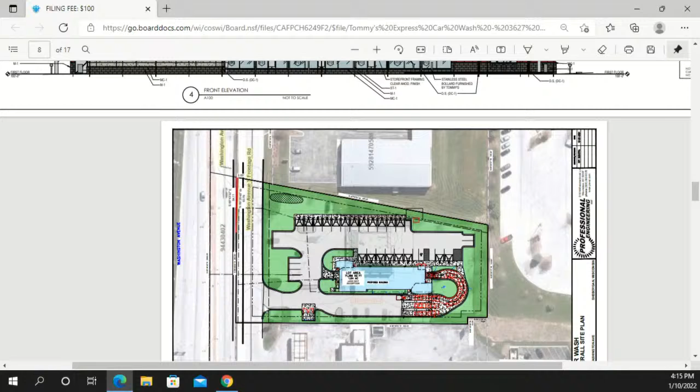This building is a pre-manufactured metal structure made with ACM metal panels for the red, the black, and the white.

There is also, you'll see, these are stainless steel metal pieces that will go along here, along with a composite material here.

If you'd like, I'd be happy to pass around a material board. Here you go. Sure. To give you a feel for how this is laid out, this is the site here.

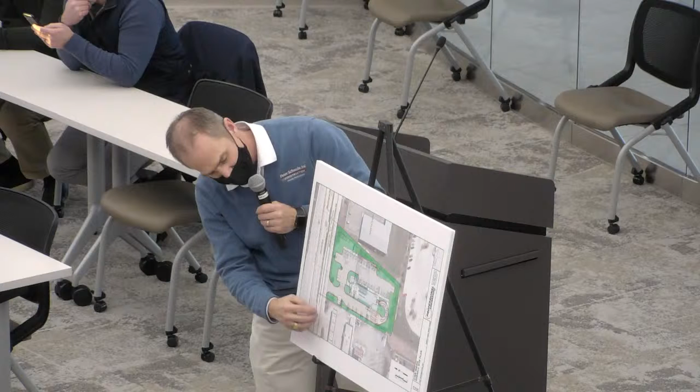This is Washington. This is the access point right along here with the frontage road. There is currently a gas station on a very hard corner, and then another business on this side.

Our property will be accessed right off the frontage road on the north side of the property.

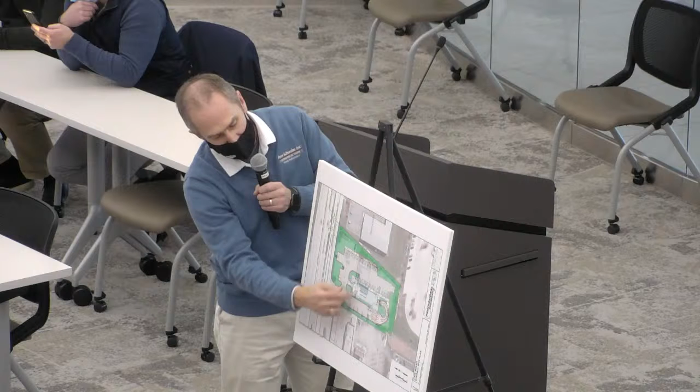Again, the cars will drive through the back side here, the south side, and exit out here, having the choice of going and using the vacuum system over here to the east of the property, or exiting out again on the north side of the property.

From an elevation standpoint, you notice that it's an attractive building with glass to allow a lot of light to flow through the inside of the building while people are going through it. It is also set with 2 towers. One tower is 24 foot tall, the other 28. The 28-foot tower building will have on the first level the control center where someone will be able to stand and see all activity at one time, what's going on. And the second story is the training and management office up there.

And with that, I'd like to turn it over to you to see if you have any questions to help me better explain it.

I think I just need a fancier car to be able to take it there.

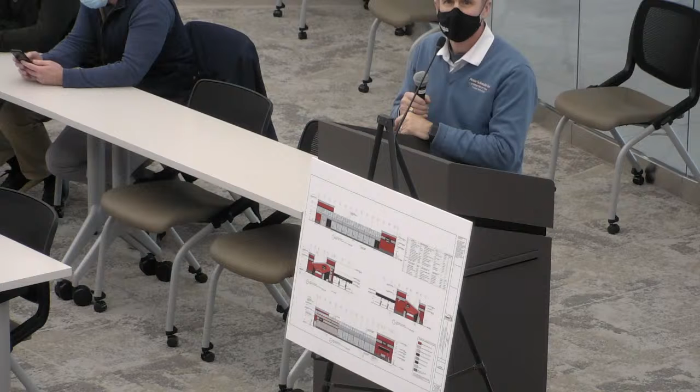No questions or comments from my end yet. Anyone, other board members, questions? Is this the first one of its kind?

Do you have others? This is the first one that's being built in Sheboygan. Steve, can you answer the question as far as other locations of this? Sure. So there's a few others in Wisconsin. There's one in Wausau, I believe, and then there's one in southeastern Wisconsin, Milwaukee area. There's two or three that are actually called Coast car washes. That was the original concept, and now Tommy's Express is starting to franchise these. So across the country or across the Midwest, there's about 60 of these right now, with a pretty aggressive growth plan. And they've been in the car wash business for close to 50 years now as a family, and this is just their next step in evolution here.

And like it was mentioned, it's really a state-of-the-art facility, and even with the light that comes into the car wash, it's an entirely different feel than the typical dark tunnel that you would go through when you go through a car wash, and it's really inviting from that standpoint. So we just think it's a new state-of-the-art car wash we're excited about.

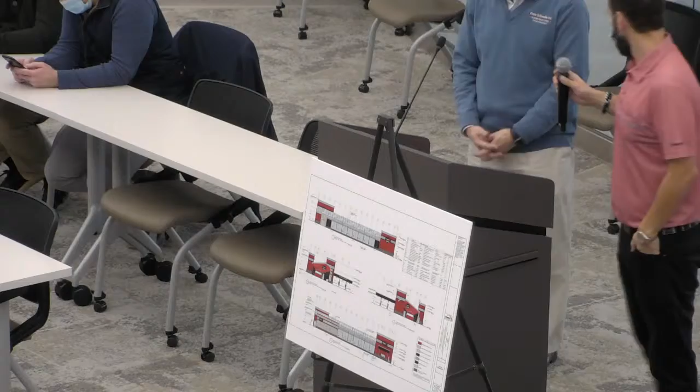Maybe if you could talk just a little about the mechanical systems and if there's any of that visible, or if that still needs to be designed at all, how it integrates with the rest of the massing.

It's a great question. I'll be honest with you, I'm not the expert on the actual system itself, and if you need me to, I can get an expert on the phone with Tommy's. However, I can say this system is already being used throughout Wisconsin in a half dozen locations, as well as around the country. The system, in essence, one of the technological advances of it, has more of a magic carpet system than the old-fashioned rolling track to move cars through. Because of that, they're able to move cars through almost twice as fast as a typical car wash you'd see today, which allows not only for a good washing system, but also helps the citizens of Sheboygan get their car washed a little bit faster.

Yes, Commissioner, he was actually talking more about external mechanicals on top of the building. Oh, okay, thank you. Ground level or rooftop type. I do not have those details with me today, but I can get them for you, or I can get someone on the phone immediately to tell us how that works. Typically, without that information, we'd make that a requirement of the submittal that be submitted to the city for approval, so that we can make sure we don't end up with a monstrous rooftop unit.

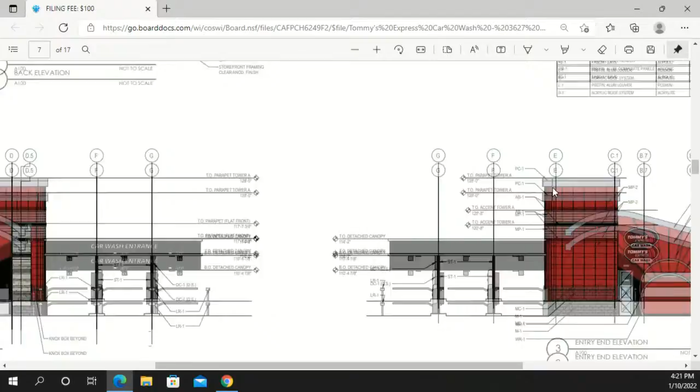And we'll be working with your landscaping department. Right now, we have a transformer planned to be in the same location that you saw in the video, and as you can see, there are some bushes surrounding it to help shield that from the view of the public.

Thank you very much. I could use my projection voice without the mic, but the people at home wouldn't be able to hear me. My question would be why the location for the transformer there and not off to the side or shielded like by an enclosure of some kind, like where trash would go?

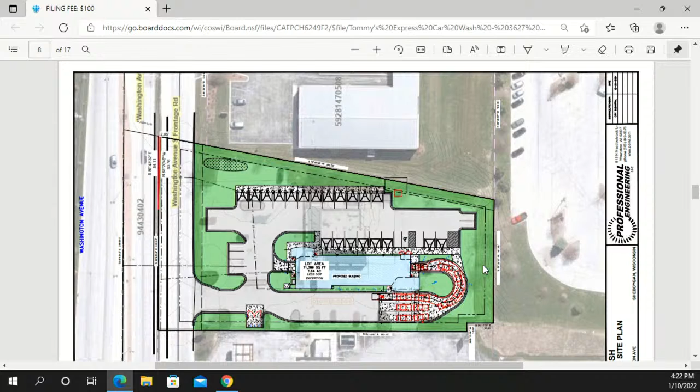It's a great question. We found with many of the buildings we've built that We Energies has certain requirements of how close transformers have to be to the building, so we're making the presumption that this matches what other buildings we've built and how close they've wanted it. If it's a requirement of the city and We Energies is concurrent for us to move it to a different location, such as the existing location further off right there, we will definitely consider that as an option. We placed it there to show there's a space near the building if We Energies wants it that close to the mechanical room for their direct connection. We'd be more than happy to consider other locations if they're open to it.

I'm looking at the site plan, and I'm looking at your parking area, and I see some unusual shapes in the area where the cars would be parked, looks like little Martian umbrellas or something. Yes.

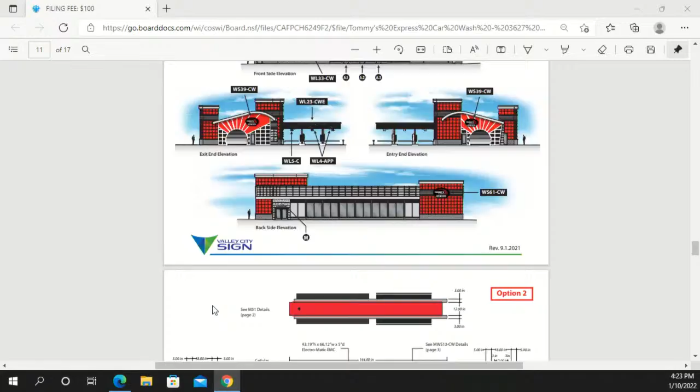Could you bring up the photos and show some, the next one down further? Right there. We probably can't zoom into that. Nope, that's not it either. Let's see. Are you able to bring up the PowerPoint presentation that I'd given to you? Okay, we have a PowerPoint presentation that has additional photos of the inside and the outside of the building, and he will show you a closer up of the vacuums. Is that the answer, as you said there?

So looking at that plan, there are about 20 of those triangular shapes, and those triangular shapes allow for vacuums that hang over and allow people to get both sides of their car to vacuum. So I hope that answers your question. It does, thank you. Okay, thank you, Commissioner.

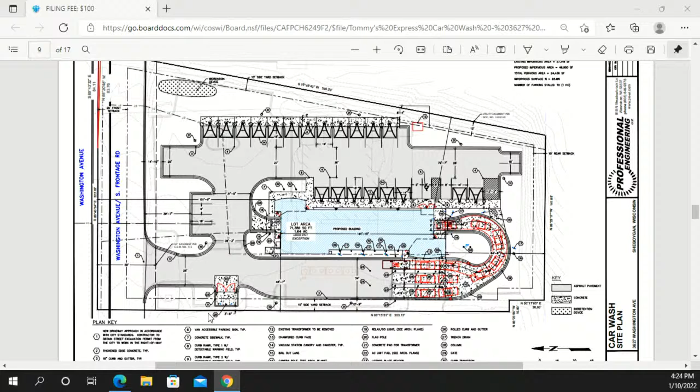Any other questions or comments? Pam? I too have a loud voice, I probably don't need that. Well, pass the mic down so the people online can hear.

People at home, right? So this is the fanciest car wash I've ever seen, and I love to have a clean car, so I'm pretty excited this is going in. Is there anything, is the inside all car wash, or is there an area for snacks or food or a...?

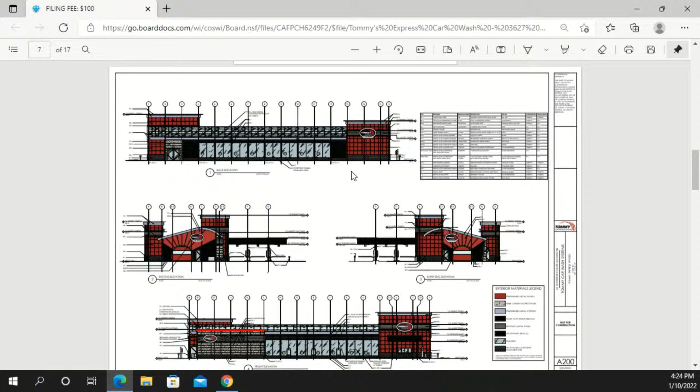On the left side there is the mechanical room where you see the glass door, and then right where we're standing right now is the central control room. There isn't a location for people to come in and get peanuts and sandwiches and stuff like that. It's meant primarily for the employees to see what's going on and take care of the customer. Thank you. Sure. Look at that. Wow.

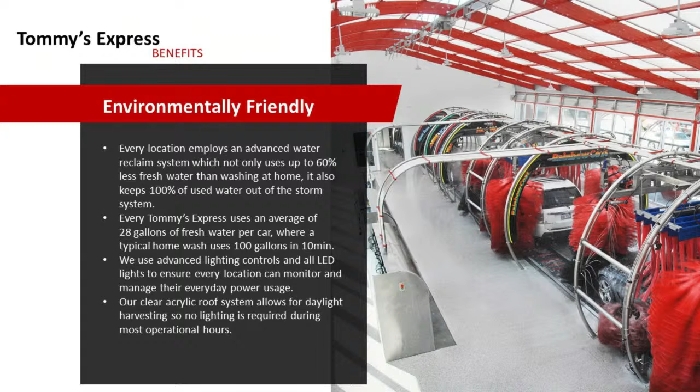That's amazing. You don't get out of the car. You stay right in it. You stay in the car. Correct. I was thinking you get out and they push your car through. Got it. Okay, you stay in your car.

Just talk real briefly maybe about what you would expect as a customer as you pull up, and how you pay. Yeah, great. So there'll be 3 lanes of traffic. The inside lane will be for a cashier if someone wants to pay with cash, and the next 2 outside lanes will be set up to either recognize your license plate if you've bought a monthly subscription, or you can use an app as well. So those 2 lanes are meant to let monthly members bypass, and the inside lane is for cash. You'll then pull in.

There'll be someone that'll greet you and wave you on. And it's not the typical rollers that you see in a car wash—we'll call it a magic carpet, so it's much easier to get on, and it's very smooth. It'll take you through our tunnel, and the light is a really big plus.

You don't realize how great the light is in a car wash until you've actually experienced it. Your car will get clean, dried off, and you'll have the option to go to the vacuums or keep on going—it's a very fast and efficient way to have your car washed. It also has the ability to let bigger vehicles, like pickup trucks, get through, which many car washes struggle with. That's another benefit.

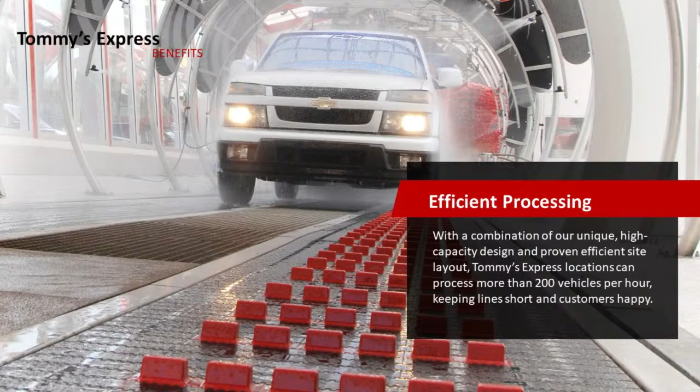So you are doing your own interior cleaning, vacuuming and everything. Yes, you're the customer, you do it, so you never have to get out of your car. You can pull right in, and once you purchase a monthly subscription, it's a really efficient way to get through the car wash.

Question for you on the glass. What I've seen in previous car washes that have had glass, especially in the winter, is fogging and staining that's hard to get out. Not necessarily the steaming up, but where you get seepage and water build up inside, causing permanent stains. Have you found a way to prevent that?

I can't answer that entirely. I can tell you that as part of the operation there's an hourly cleaning schedule, pressure washing the floor and working through it. The details of that system I don't know, but what they've put together has been very impressive. I was at their headquarters recently in Holland, Michigan, and it was cold, and there didn't seem to be a problem. Unfortunately, I don't have more for you today.

Mr. Commissioner, I can tell you that as part of the system, on top of the glass there are venting systems to help when it gets too humid in here, allowing air to flow out. But depending upon the time of year, whether those vents are open or not will vary greatly.

Well, it's a fun building. If there are no more questions or comments, I would entertain a motion.

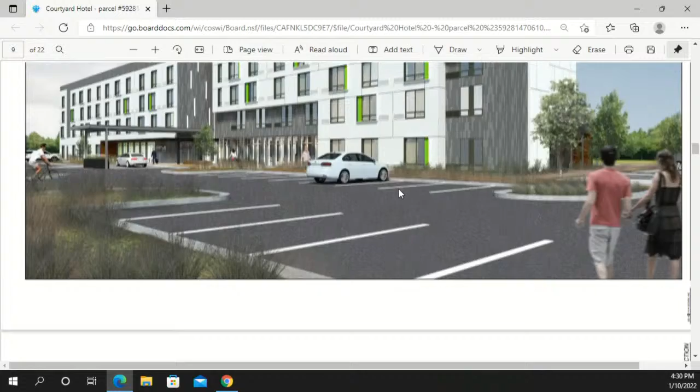The exterior cladding is primarily EIFS and fiber cement, vertical fiber cement panels, and then there's some miscellaneous exposed steel like the carport, which will have stamped concrete below it, as well as some awnings in the back, like trellis-type awnings that have some red cedar screening. And as you come back here, this is the southeast side of the site.

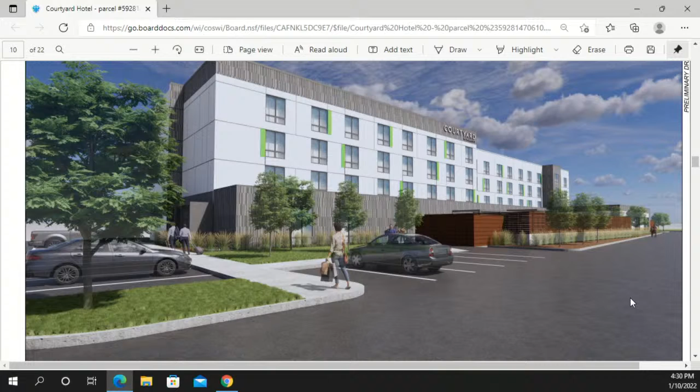All mechanical equipment will be screened, and Courtyard has a dedicated courtyard that feeds off of the interior lounge and bistro bar that's inside, which has a full functioning kitchen.

Again, the screening on the outside includes a molding down on the bottom, or a base, that is covered in EIFS, and then again some red cedar fencing for either screening or privacy purposes.

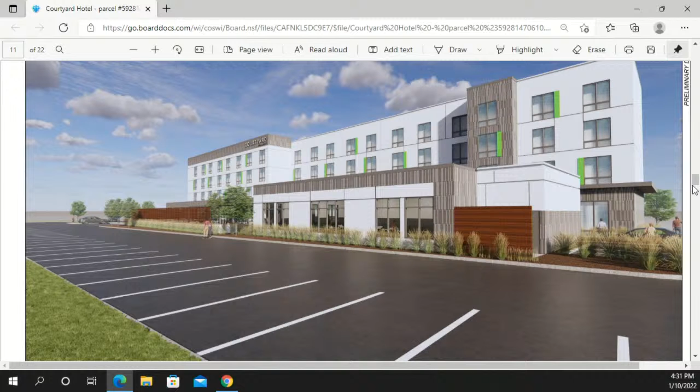There's a dumpster on the northeast corner that'll be made of split face block, with trash, recycle, and an attached shed for site maintenance for the owner. And we are proposing to combine the sign currently there for the Fairfield to make it a Fairfield Courtyard, one combined sign.

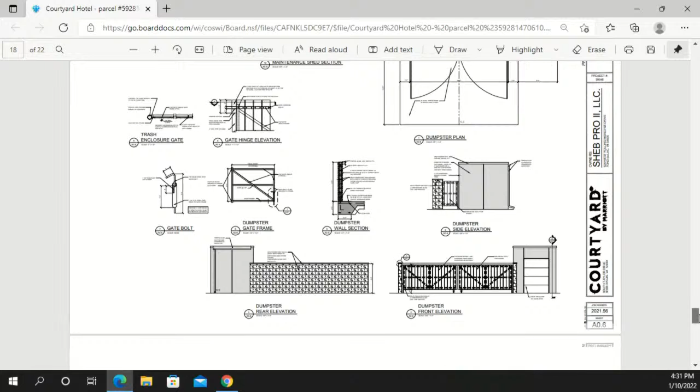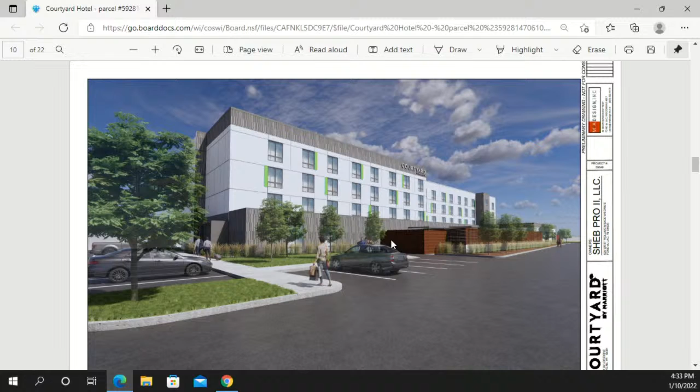When you see this type of view, this is looking at the courtyard. You'd see maybe this front portion, and these are the elevations you'd likely see driving north from the business park towards the intersection of Washington Avenue, or heading north on I-43, you'd be seeing the rear elevation and this west elevation. So just to make sure the board is familiar with what's most visible from the streets.

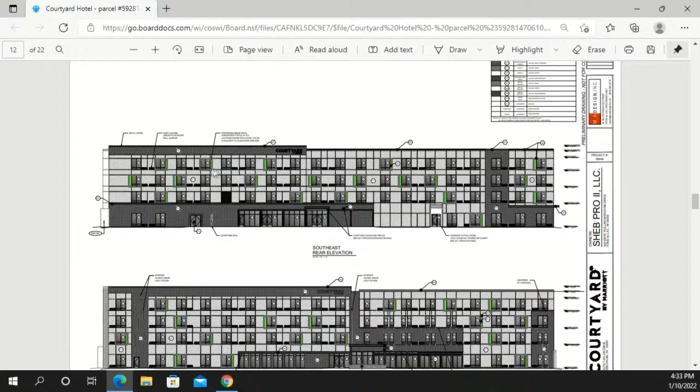Thanks, Steve. That was confusing to me initially, just the orientation of the building. I think looking at the site and the location of the driveway, where you're coming in sort of aligned with the drop-off canopy, that entrance becomes a lot more evident. And it looks as if you're using that frontage for sign area, that makes sense.

I guess my biggest question at the moment is on what I'd consider the backside where the patio is. Is there an entry point from the parking there? It seems like that patio, and is that the pool back there, is kind of screening the parking lot from the hotel.

Yeah, there's more — I would call it more of an exit. The way Courtyard wants this functioning is a guest would come into the building and then function from inside out, rather than an outsider or someone from the parking lot coming into that courtyard area. It'd be guests — the restaurant is primarily for guests, not like a public restaurant. I don't believe you make reservations outside.

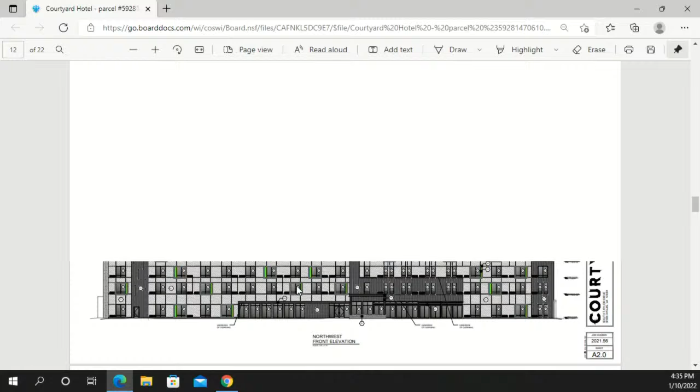It just seems if you're parking along that southeast property line, you've got a long hike around the building to find the entry and get to it, and it's not overly welcoming on that backside. That being the case, I don't know if you'd looked at shifting the building to get the driveway back there for fire department access, to get more parking out front closer to the entrance, or was there not room for that?

Correct. So if you want to zoom in there — basically the way that shared entry point is, that obviously can't move. The orientation of the building itself lends itself to being in that orientation. But I guess, are you saying like trying to get a double row of parking on that side there, on the northeast side? Now, if I'm parked along this back side, I have to go the whole way around the building.

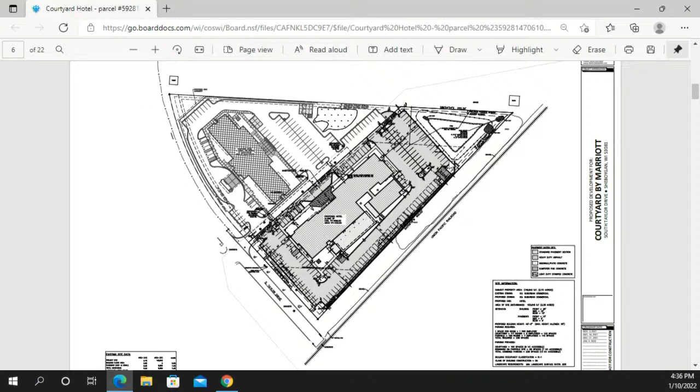Oh, I see what you're saying — to get access to the front door of the building. Oh, no, sorry, there's entry points on each side of it. You just can't come from... let's go to the building elevation, or floor plan. So those sides have entry points.

You would prefer the floor plan to show that? Sure, that would make sense. Okay, so on the plan view on top, where your mouse is, you'd come off to the sides, and each side has entry points for the general public. You'd have your key fob, and you'd check in at the front rather than through the building. You're coming up on that end through the hallway on the north, or the east and west sides.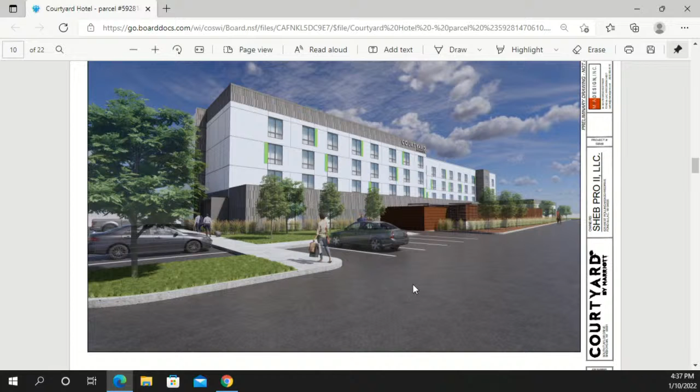Other questions or comments? Jerry? I was just going to comment, I've stayed at quite a few of those properties, and usually you check in the front, and a lot of them are on combined lots like we see here. You check in, and I tend to go to the back of the building like you're pointing out, but you do have access once you've checked in with your key. They just don't want random people coming in off the parking lot freely. And if you're eating inside, it's a controlled, locked area to the patio, so once again you don't have random people. But I personally think that side of the building looks better than the canopy side anyway. That's just my input.

Steve, I think it's on sheet 9, page 9. Can you put this up? On this image, it shows grills next to the windows that I'm guessing are air conditioning units, but that's not shown on any of the other drawings after that. I've seen a lot of these new hotels going up, and those air conditioning units always show up white against some other color, sticking out like a sore thumb, and that's all you see on the facade. So I'm curious what the plan is for these on the building, and why they're not shown on any of the other images.

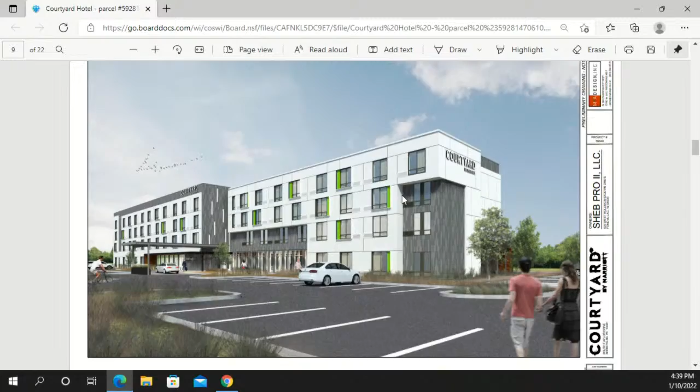Those are PTAC units, like you'd see if you've stayed in a hotel, what Marriott would do too. They're architecturally like a Kynar painted louver, and it would match the EIFS or the gray panel, so it matches the adjacent material. They would be the same on all elevations, next to the window, out to the side, rather than underneath. I believe that's how their prototype is set up, with the window and then the unit off to the side.

Good question, thanks for clarifying, Chad. Other questions or comments, concerns?

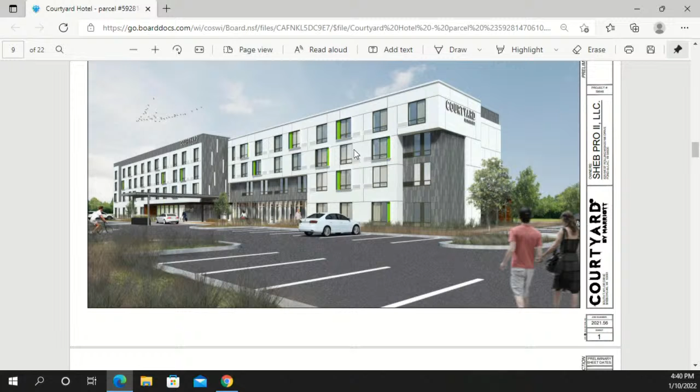The gray panels shown on the elevation, what material is that? It'll be a fiber cement panel, with a hook-like cladding system on the backside, and they're long, narrow panels that sit on this track system. Thank you.

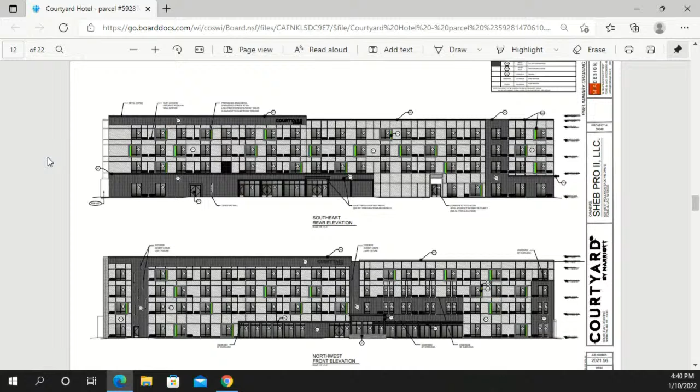And our same old question with mechanicals, not seeing any indicated on the elevations. Are they screened with a parapet? The reason you don't see them is any mechanicals on the roof we usually inboard, but they should be covered by either height or parapet. The stuff you see on the renderings by the pool would be a mechanical system, and we'd screen that. Over by the courtyard area, that would house the commercial kitchen with units out there. So everything would mostly be screened.

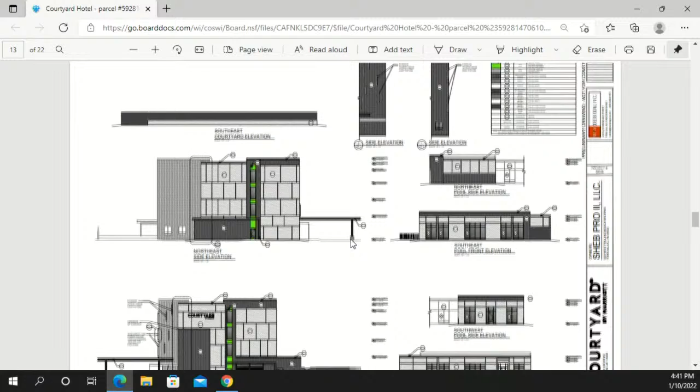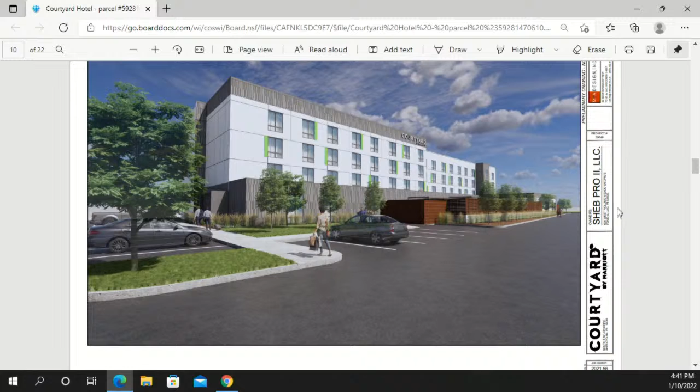Right there, that one on the right would be the pool equipment room for the pool, and to the left of the back courtyard area, if you go straight in, the first little blip straight in that direction goes into the commercial kitchen.

So I would certainly entertain a motion at this point. We have a motion and a second for approval as presented. Any further discussion? Hearing none, all those in favor signify by saying aye. Aye. Opposed? Motion is approved. Thanks for your time, thank you very much.